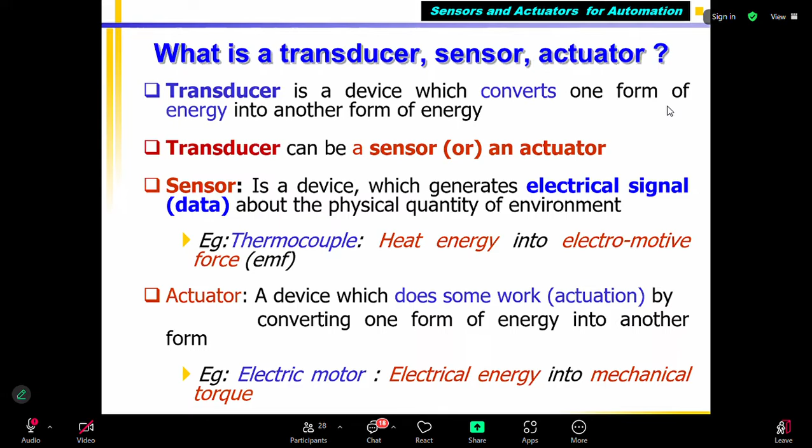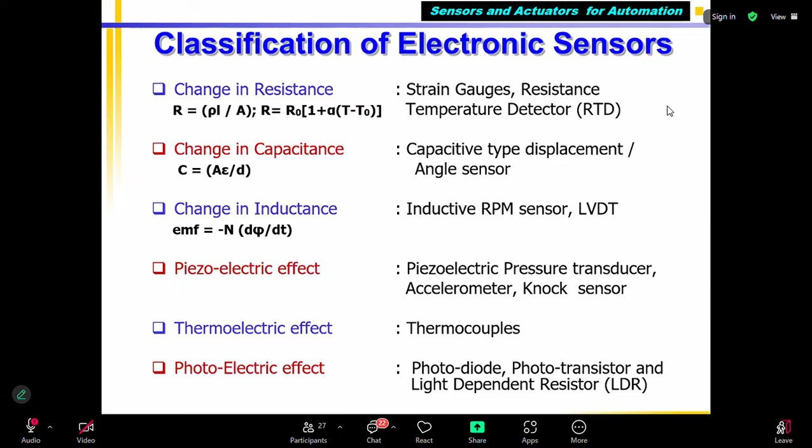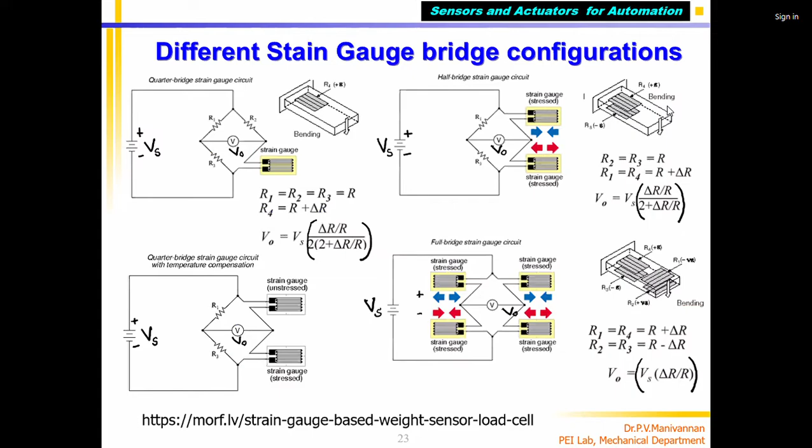So we started talking about sensors some three or four classes before. We started from the definition of a sensor, actuator, transducer, all these things. What is an electronic sensor, its characteristics, and classification of sensors into six types. Then we looked at different types of sensors. We started with the capacitive sensor, then inductive sensor, LVDT. Yesterday we talked about the resistive type, strain gauge, all those things.

And yesterday somebody pointed out a small error. He is correct. This is dH by H. Thanks for reminding. I made a mistake while writing, so I corrected it yesterday.

Somebody told that in the class. That's good. Roshan has told that. Roshan or somebody told, not somebody else. Okay, in the derivation, this point was because I put a dA by something else there. So he told me, correct?

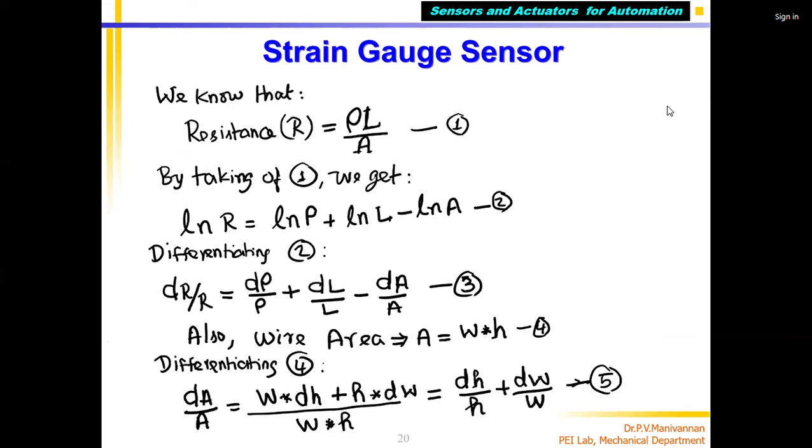That is correct. Okay. Now, before continuing further types of transducers, I just want to talk a little more about important terminologies and the classification of sensors. Already we saw three types of sensors: capacitive, inductive, resistive type. They are the most important sensors used for measuring devices. Of course, we are going to see the thermoelectric, piezoelectric, and also the photoelectric. Before that, I want to talk a little more about sensor classification.

Sensor classification we saw here. Apart from this classification, it can be further classified into two types. One is called passive sensors, the other one is called active sensors. A passive sensor generally receives energy from the environment, correct? If I want to measure temperature, for example, I have a metal block, and it is hot. I want to measure the temperature of this.

What I do, I take a thermocouple. The thermocouple junction will be made to touch this block. So the heat from this will transfer to the thermocouple junction, and an EMF is produced. Thermal energy, heat energy, is supplied to the thermocouple junction. Because of that, the thermocouple end of the wire produces an EMF, which is proportional to the temperature. That means it receives this.

The thermocouple is called passive. It is not going to generate any energy and send it out. It is going to receive heat energy from the object whose temperature we are going to measure. This is a metal block. The metal block has some heat, it is at a high temperature. Because of that, if I touch it here, heat will be transferred.

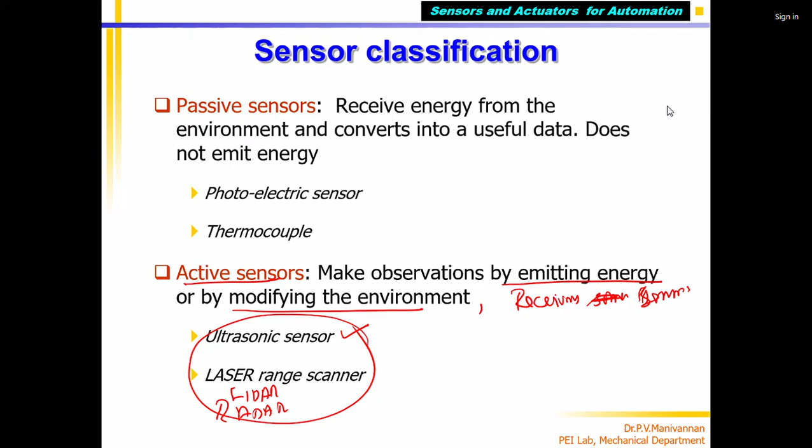They generate an energy source, electrical pulse, light pulse, or ultrasonic pulse, that will be transmitted. If it is reflected back, it will be detected by the sensor, which measures the time duration and from that calculates the distance. That is how range sensors work in an autonomous vehicle. These sensors are called active sensors. Next, these are important terminologies.

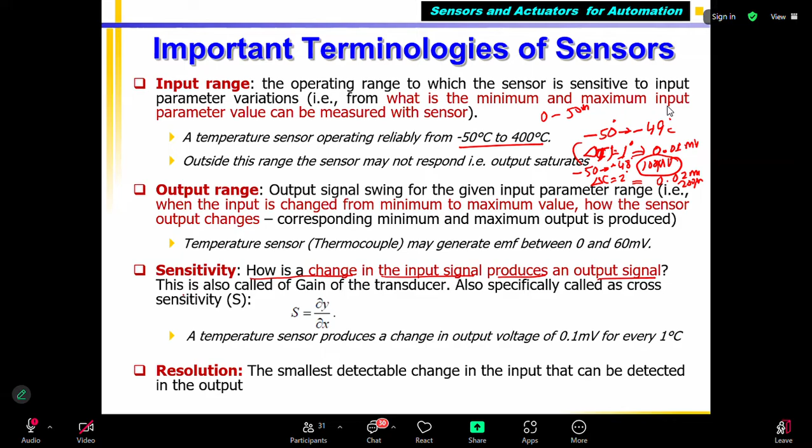This is also called the gain of the transducer. What is the output variation? When input is varied by delta T equal to 1 degree, delta V output is, for example, 1 millivolt, or it can be 2 millivolts, 3 millivolts, or 0.3 millivolt, whatever it may be. So the higher the output for a smaller input change, the more sensitive I say my sensor is. When it is highly sensitive, I can measure small variations also.

I can measure 0.1 degree also, not only minus 50 to minus 49, I can measure minus 50 to minus 49.9 also, if it is able to produce higher voltage. So when a sensor produces more output voltage for a small change in input, we say high sensitivity. Sensitivity, generally capital S, is given as dY/dX, where Y is the output and X is the input. X is the temperature change, and Y is the millivolts coming out of the sensor.

A temperature sensor produces a change in the output, for example, 0.1 millivolts for every 1 degree. That is called the sensitivity of this thermocouple. If a 1 degree temperature change produces 0.1 millivolts, then for 100 degrees you multiply by 100 and get 10 millivolts. For 100 degrees, the thermocouple will produce this.

The next one is the resolution of the sensor. The resolution is the smallest detectable change in the input that can produce a detectable output. Sensitivity and resolution both look a little confusing. For example, I have my thermocouple. The thermocouple is my sensor, and it produces an EMF. Here I have temperature as input, and it produces an output, plus and minus. It is going to produce a proportional value.

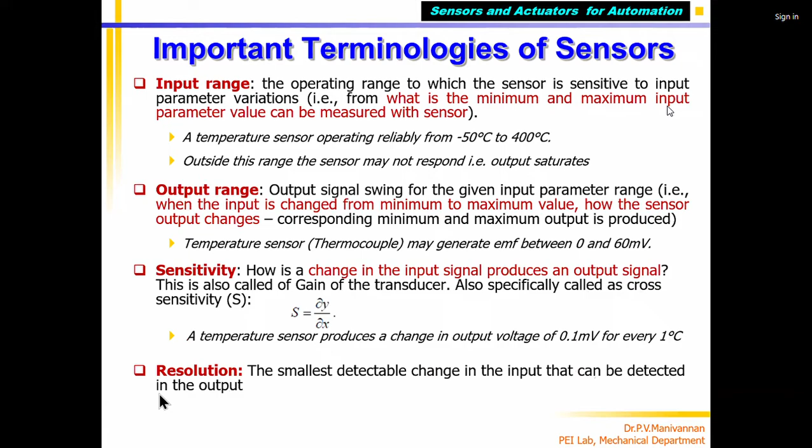No problem. Okay. Then the next important thing is what you call time response or latency of the sensor, which is defined as the speed with which the sensor can react to the changes. For example, initially temperature is 0 degrees. Now I suddenly change my temperature to say 2 degrees centigrade. Okay, this is the thermocouple input. That means I have the metal block. This temperature initially was 0 degrees centigrade.

Suddenly, somehow, I am a magician, I think like a god, but practically not possible. Suddenly I am able to raise the entire block temperature to 2 degrees or 5 degrees centigrade, for understanding purpose. Okay, suddenly I changed it to 5 degrees. How I made it, don't ask. If we heat, it takes time. Understanding purpose. So on this I have my thermocouple. My thermocouple is touching it. Correct? So EMF should be there.

What should be the initial? This thermocouple produces 0 to 400 degrees means 0 to 40 millivolts, for example, for understanding purpose. When it was 0, the thermocouple output was 0 millivolts. Now suddenly I raised it to 5 degrees centigrade. If I draw with respect to time, my input was 0 at t equals 0 seconds. Suddenly I made it 5 degrees, the block temperature increased. Now if I see my thermocouple output coming out of this wire, it should immediately go to 0.5 millivolts, correct?

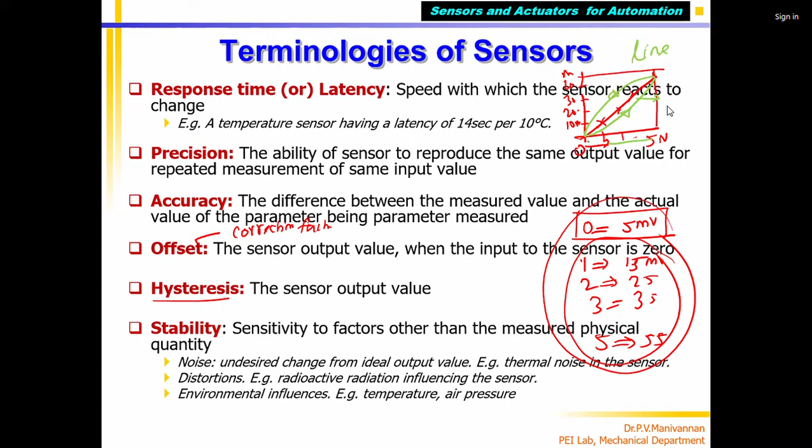From 0 to 5 Newton, it increases 10 millivolt, 20 millivolt, and it goes to a peak at 5 Newton, 50 millivolt. If I reduce 5, 4, 3 like this, it doesn't come back on the same path. Instead, it takes a different path. If there is this kind of path, one forward, one reverse, that is called hysteresis in the sensor.

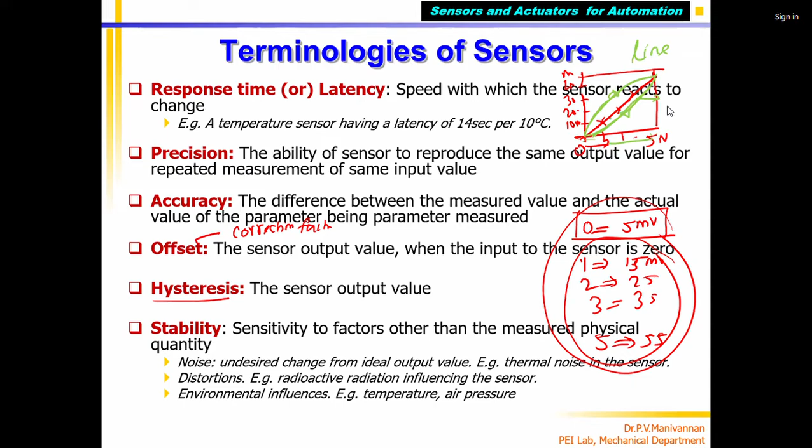This kind of sensors are really not good. Correct? They are not good sensors, but there are some sensors with this behavior, and you need to calibrate them. The last one is stability. Stability of a sensor is the sensitivity to factors

other than the measurand. For example, I have a temperature sensor, correct? I have a thermocouple and I am measuring temperature. Suppose I apply some little force on the thermocouple junction, a very small force. Because of that, the EMF should not change.

The output of the sensor should change only when temperature changes. If temperature is 0 to 100 degrees centigrade, it will produce 0 to 10 millivolts. If temperature is 50 centigrade, it becomes 5 millivolts. Now, temperature is 50 degrees, output is 5 millivolts. At that time, I am applying a little force on that junction. Right?

If you apply force and the output changes from 5 millivolts to 4 millivolts or 4.9 or 5.1, that is not good. I say that system is not stable. The system output should change only with respect to change in the parameter you are measuring.

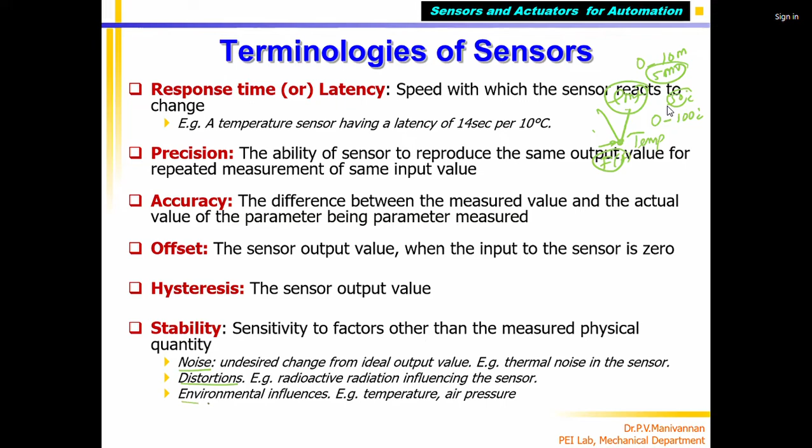A force sensor's output changes only with the force, not with temperature or humidity. If the surrounding humidity or temperature changes, the output of the force sensor should not change. If it changes, then that's not a good sensor. We say the stability is not there. The main things affecting stability of a sensor are noise, distortion, environmental temperature, air pressure, something like that. These are the important parameters you have to note down.

What is the time? We have some more time.

Then another thing is the sensor input-output characteristic. Already I talked about it. The sensor output can be of 4 types. One is called a linear type sensor. That means my input is varying from 0 to, for example, 10. Then my output is varying from 0 to 100, and it is a linear, straight line. When I connect the points and curve fit, it is a straight line. That is called linear. This is the best sensor.

The next one is, if input is varying from 0 to the same 10, the output is varying from 0 to 100, but in a non-linear fashion. They call it logarithmic. Already we talked about what is called sensitivity or gain of my transducer.

What is that? Delta X change. For example, input is changed from 1 to 2. Delta X is 1. Then the corresponding output went from 2 to 3. So Delta Y equals 1. So you can see that here, when input changes by delta X of 1 unit, the output changes by 1 unit.

But if I come here, the curve is flattening. If I cut this, with the same delta X equal to 1, the output change will be very small. It is not 1, it may be 0.3, 0.2. In this region, the sensitivity is bad. This region is better. As I go here, the sensitivity becomes zero, flat. If the sensor input-output is like this, they call it logarithmic response. This kind of sensors are not good.

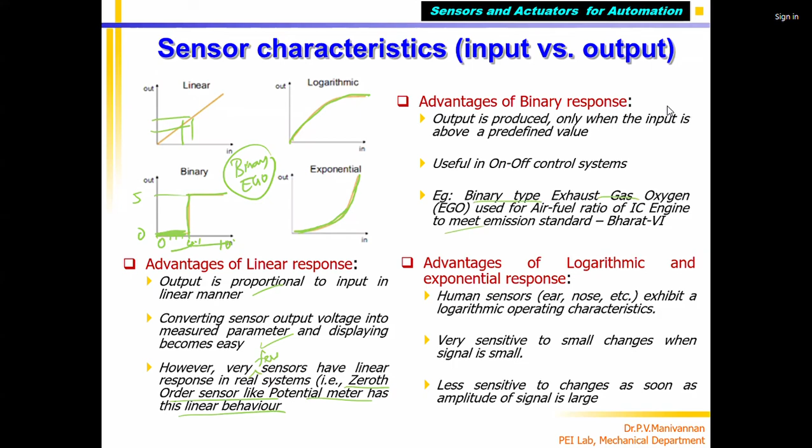What is the advantage of each one? Linear response: output is proportional to input, so converting the sensor output into the measured parameter and displaying it is easy, because the gain is always constant. Correct? Slope is constant. It can easily be displayed. Very few sensors have this kind of linear response. That is called a zero order sensor, like the TPS sensor, potentiometer, throttle position sensor. They all have linear response. That is good. The second one is binary; already talked about the EGO sensor. The third one is the logarithmic and exponential sensor. The advantage I told.

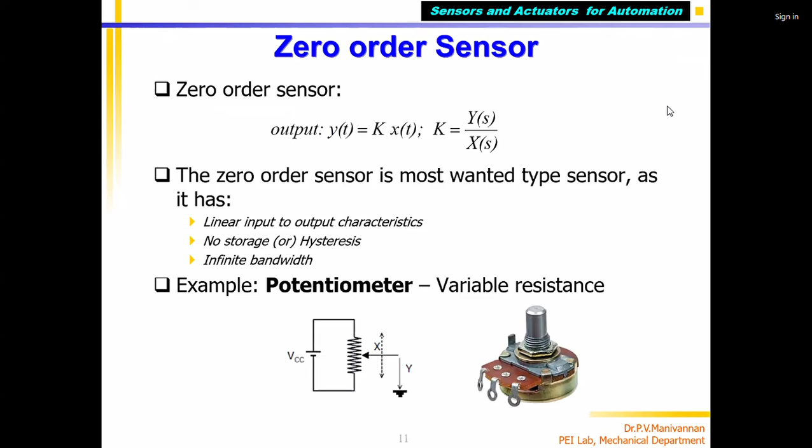Okay. I stop here. Tomorrow we'll see some more important characteristics of the sensors. Very important. Correct? What you call zero to first order, all these things.